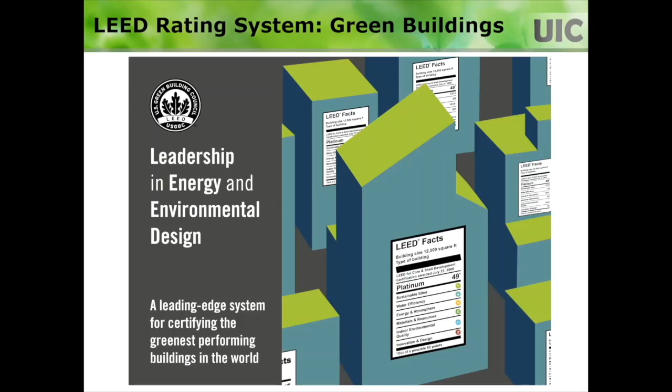Buildings are being designed and built to make them green, and the LEED rating system is often followed for this. The Envision rating system is used to develop sustainable infrastructure. If you look at an entire project, building or other civil infrastructure, rating tools such as LEED and Envision are applied, but these projects involve a lot of different project components.

For example, buildings could have foundation design. Regional stormwater management could include polluted stormwater treatment. Regional transport systems could include roadway pavement design. Polluted site redevelopment could include decontamination technology selection. I'm calling these project components.

We need to be looking at sustainability at a project component level that will contribute toward the sustainability of the overall project. While LEED and Envision are applied at the entire project level, and maybe the project is not being certified under LEED or Envision, we want to have options for designers to look at sustainability at a project component level.

So if you have different project components in a project, we want project engineers to incorporate sustainability into their day-to-day design activities. The question is how do you promote project component level sustainability so that engineers or designers can consider sustainability irrespective of whether they are pursuing any certifications for their overall projects or not.

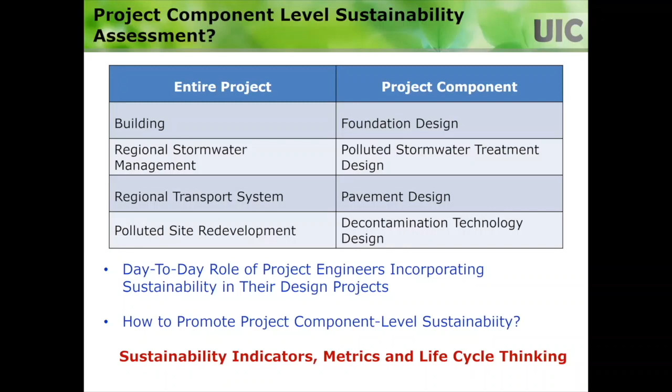For considering project component level sustainability, one should be aware of sustainability indicators and their metrics, and also life cycle thinking. Sustainability indicators and metrics are based on the triple bottom line: environmental, economic, and social.

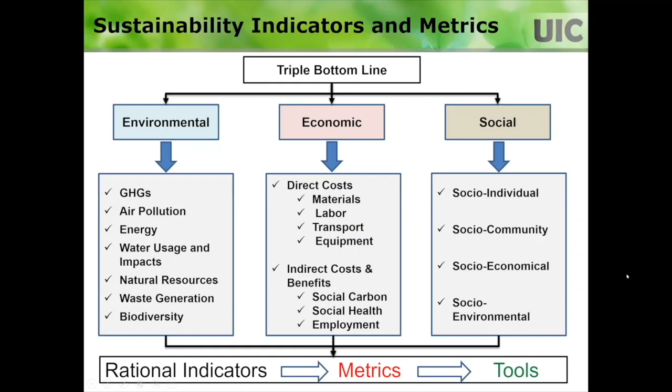You need to identify smart indicators. Examples are shown under environmental, like greenhouse gas emissions and air pollutants. Then you need economic indicators and social indicators. But these indicators should be expressed in quantitative terms called metrics, and we should have tools to calculate them. Designers and engineers should also be aware of this life cycle concept.

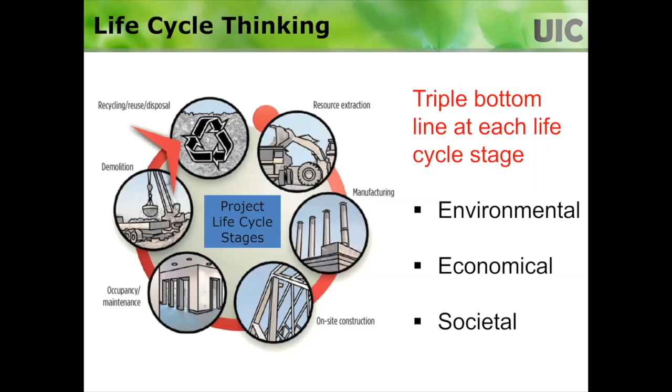We need to think about raw material acquisition, material manufacturing, construction and maintenance, and at the end of life, demolition and what should be done with the materials, either recycling or disposal. These triple bottom line aspects—environmental, economic, and social—should be considered at every life cycle stage, and all of them need to be accounted for toward the overall project sustainability.

At the project component level, sustainability assessment tools are limited, so we tried to develop a generalized framework. We called it QUALICS. In this one, we look at environmental indicators, economic indicators, and social indicators, and we apply weighing factors.

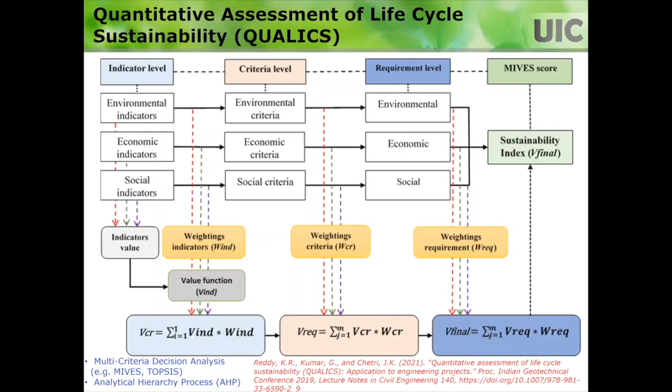We look at the criteria and requirements, and then calculate a sustainability index based on multi-criteria decision analysis, with weighing factors based on the analytical hierarchy process. We published a paper on this, and more details are in that publication.

We have applied this framework successfully for different projects, again to look at project component level sustainability. This is an example of contaminated site remediation. We have several options for remediation, and we quantified sustainability metrics for each of these options.

We used SimaPro for environmental indicators, and we looked at direct costs and social cost of carbon for economic indicators. We used social sustainability evaluation metrics, and we did an online survey to look at the social sustainability aspects.

Following the framework, we calculate the sustainability index, and based on the sustainability index, we came up with monitored natural attenuation as the most sustainable option. But based on project-specific considerations, giving social sustainability higher priority, modified capping was considered a more sustainable option.

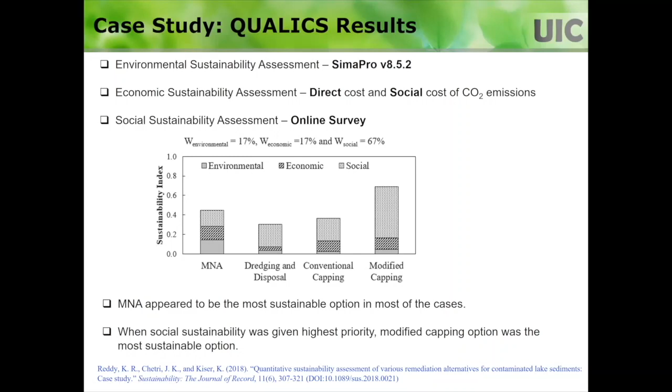There is a publication on this one. More details are given in that.

So recently, we embarked on developing a new framework. This framework incorporates resiliency with sustainability, and it can be applied to the entire life cycle of a project, or any life cycle stage of a project of any size.

The framework is flexible, with tier-based selection of tools based on the information that is available. In addition to the triple bottom line, we are looking at resiliency indicators so that we have a comprehensive sustainability and resiliency integrated framework.

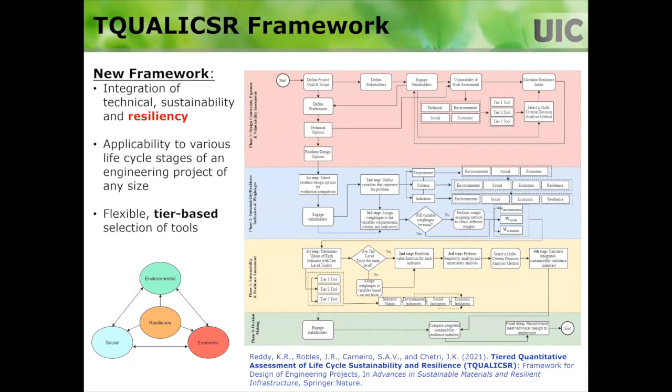So our framework is shown here. I'm going to go into details of this one very quickly. We have a publication also on this one if you want to get more details.

Resiliency is important to consider as we are witnessing a lot of these extreme weather impacts, climate change impacts, and these are expected to continue into the future until we make substantial climate mitigation efforts.

Again, showing the new framework that we developed here, it consists of 4 different phases. I'm going to go over very briefly each phase.

This is phase 1. In phase 1, you define the project goal and scope, define the preferences for the project and what are the technical options, and you look at what are the resilient design options.

So that's the linear process, but at each stage, you need to look at the different aspects. In the very beginning, you need to define the stakeholders, engage the stakeholders, and look at their preferences, keeping that in mind. And in terms of the technical options, you need to do the vulnerability and risk assessment.

In doing the vulnerability risk assessment, you need to look at technical indicators, economic indicators, social indicators, and environmental indicators. Those indicators can be quantified using different tools, and then you can use multi-criteria decision analysis to calculate the resiliency index.

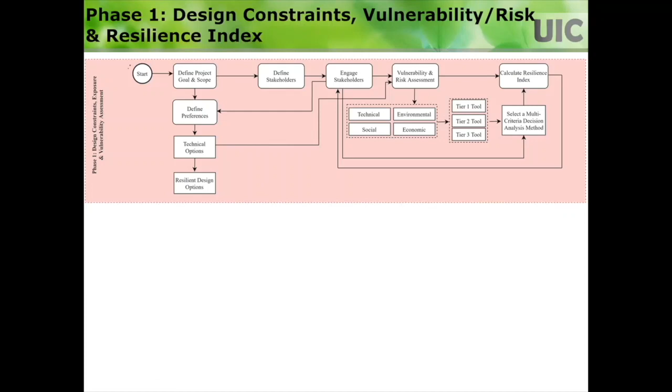And then again, you feed back that information to the stakeholders and get them involved. And then finally, you identify what are the resilient design options that you want to pursue.

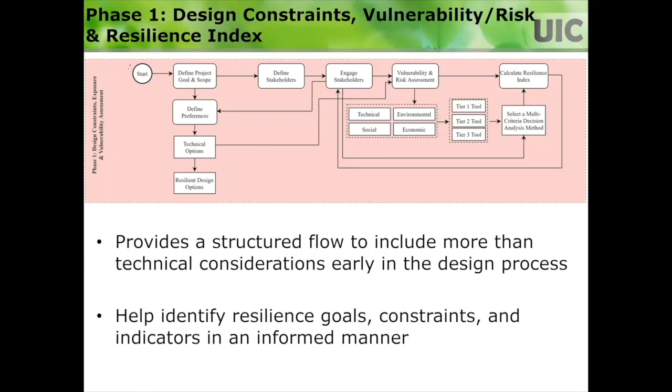So this phase 1 provides a structured flow to include more than technical considerations early in the design process, and helps identify resilience goals, constraints, and indicators in an informed manner.

So in phase 1, the most important aspect is resilient design options. And this has to be done based on the vulnerability and risk assessment. You need to incorporate adaptive measures to make the system resilient.

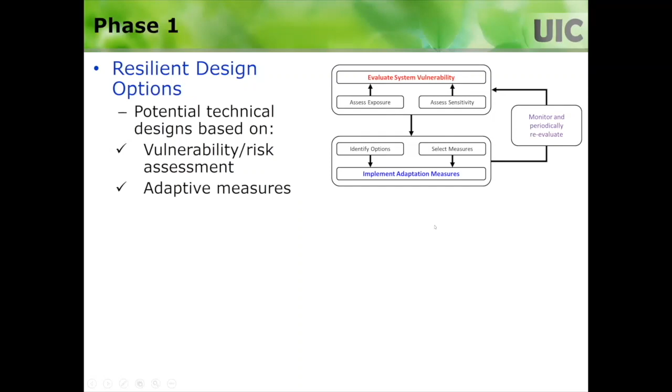Again, there is a methodology where we do the risk assessment, we incorporate the adaptive measures, and we suggest a monitoring program to keep evaluating the performance of these systems even after they are implemented.

In this one, in the very beginning, we need to identify hazard resilience indicators and metrics. They could be technical, environmental, economic, and social, and they're all interlinked.

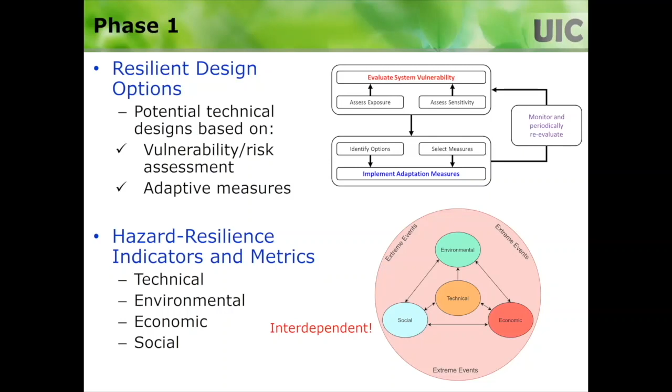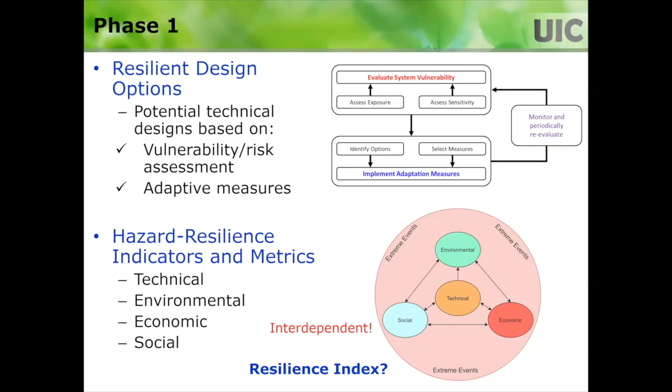Based on these interdependent indicators, we can calculate the resiliency index that can help us identify which resilient option is the most preferred option. In phase 2, we get into the sustainability assessment of the resilient options that you came up with in phase 1.

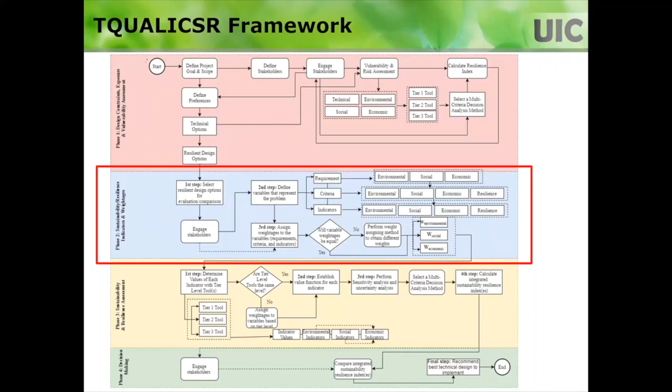In this one, we look at what are the resilience options that you want to pursue in the very beginning, and you want to engage the stakeholders and see their preference.

So once you identify potential resilient design options, you want to look at what are the sustainability variables to represent the problem, and do you need to consider any weightages for those variables. If you are going to consider different weightages, then how are you going to calculate the weighting factors - maybe analytical hierarchy process or other methods that you can use to come up with the weighting factors.

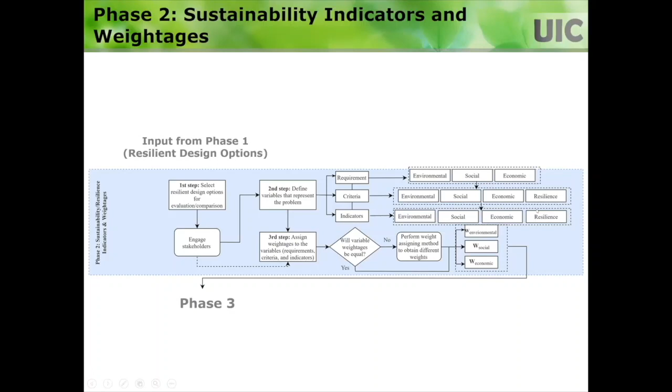And then you define requirements, criteria, and indicators. In the requirements, generally we have environmental, social, and economic. In terms of criteria and indicators, we have this triple bottom line - environmental, social, and economic - but also, to integrate sustainability and resiliency, we have resiliency indicators included in this one.

So you have requirements - environmental, economic, and social. You have criteria and indicators. As I mentioned, indicators include triple bottom line aspects. In addition to that, we have resiliency indicators in this one.

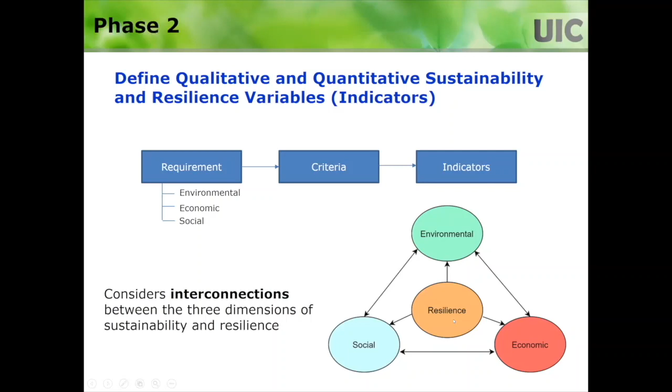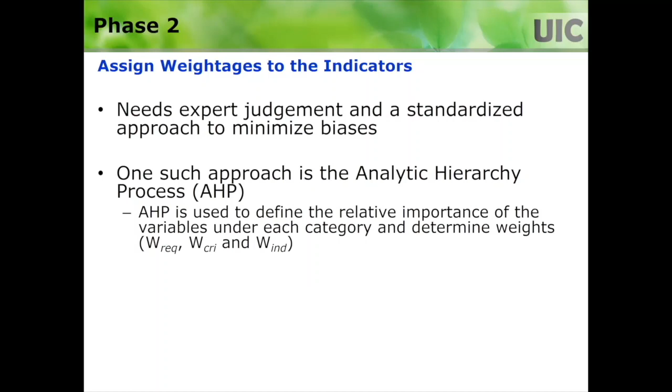So you apply weighting factors based on analytical hierarchy process that includes the relative importance of different indicators or variables. You compare the variables against each other and derive the weighting factors based on that. Weighting factors could also be at the tier level. Tier 3 is a more quantitative approach that can be weighed more compared to tier 2 and tier 1, which are based on limited information.

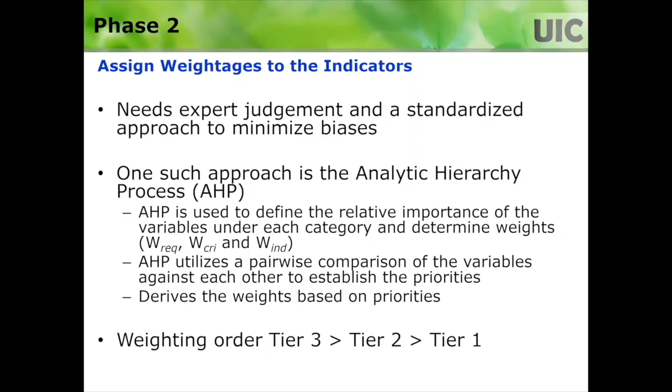In phase 3 of the framework, you calculate all the indicator values using different tools. So you have environmental indicators, social indicators, economic indicators, and then you look at what tier you're using. Do you need to assign a weightage for the tier? And then once you have all the indicators...

...with different values and different units, you want to normalize those using some kind of multi-criteria decision analysis method, and you want to do sensitivity analysis of those indicators. You could have a range of values for some indicators, and you want to also assess the uncertainty. Using this multi-criteria decision analysis, you can calculate an integrated sustainability resiliency index. Before we used to call it sustainability index, but since we are integrating resiliency here, we are calling this one sustainability resiliency index.

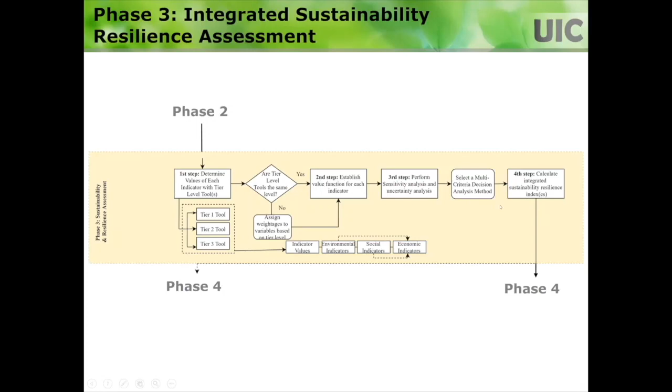The bottom line is we need to calculate these indicator values using different tools, and these indicators could be qualitative and quantitative. Some of them are hard to quantify, so we need a flexible approach to calculate these things. The bottom line is we need to indicate all these values numerically, and to accommodate the amount of information available, we proposed a tiered tools approach. Tier 1 is qualitative, tier 2 is semi-quantitative, and tier 3 is quantitative, more advanced.

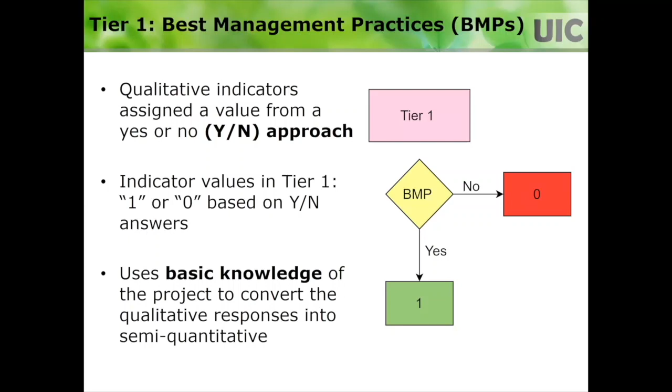In tier 1, we are talking about considering the best management practices. If you are considering the best management practice in your project, you get a score of 1, otherwise 0. This needs basic knowledge, and we are able to get some way to quantify what sustainability aspects are incorporated in the design.

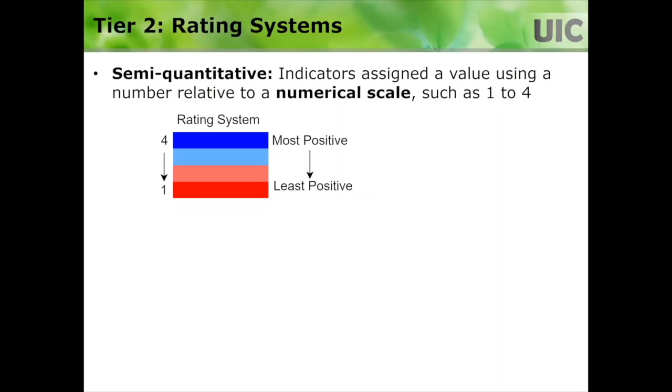So tier 2 is the rating tools. This is considered a semi-quantitative approach. You come up with the indicators and come up with a numerical scale, maybe 1 to 4. The 4 would be most positive, and 1 would be least positive. And based on this, you can come up with quantitative values for different indicators.

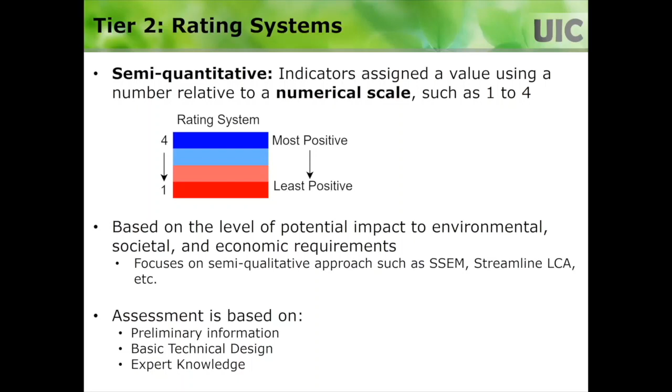There are some tools reported in the literature, such as the social sustainability evaluation matrix. For this one, you need a little bit more advanced information and expert knowledge to be able to give proper rating systems.

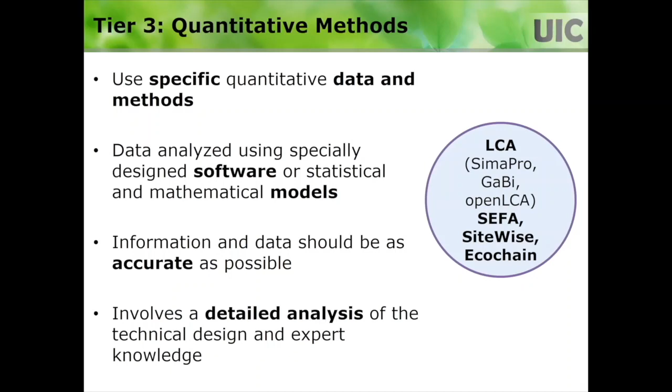The third one is the more comprehensive approach, quantitative methods. In this one, you use specific data and methods, and you have software and models that can help you quantify these indicators. For example, life cycle assessment could be used to calculate the environmental indicators. This is more detailed, and obviously you need more technical design, detailed technical design, and expert knowledge to be able to use this tier.

So we propose this tiered assessment because you may not have all the information you need for every project, for every indicator. So we wanted to have the option to use any information available to the user. And also, sometimes you don't have time, tools, or means to perform such assessments.

So just as an indicator, if you are looking at economic indicators, tier 1 could be some basic information, tier 2 could be more advanced, and tier 3 could be more advanced analysis like life cycle costs or cost benefit analysis.

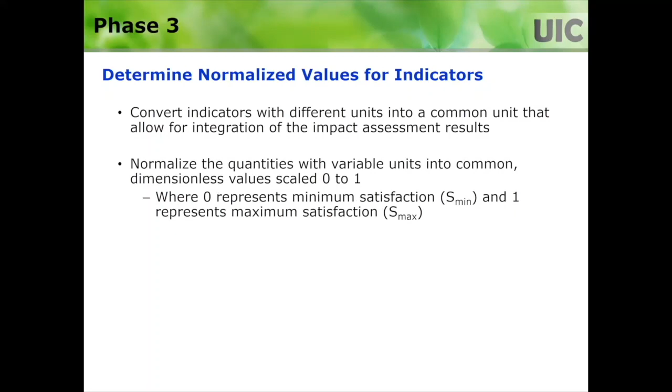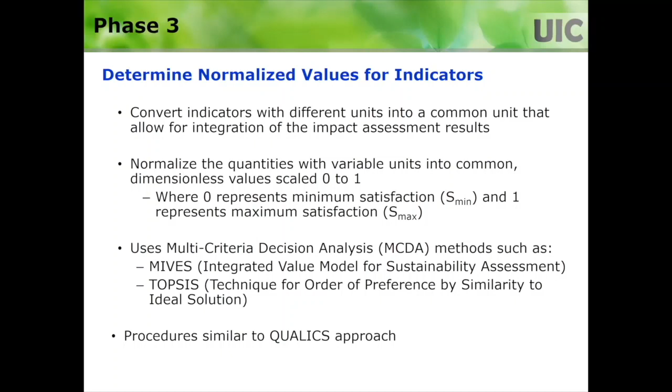So once you calculate the indicators, we need to normalize those values so that we can integrate them, generally from 0 to 1. And we use multi-criteria decision analysis, such as MIVES or TOPSIS, and we calculate the sustainability index. Here we are calling it the Sustainable Resiliency Index, similar to the previous framework that we developed.

It's important to do sensitivity and uncertainty analysis because a lot of input values are needed, and you want to look at your outcome: is it sensitive to any of the input parameters? Also, some input values could have a different range, so you want to look at that uncertainty analysis as well.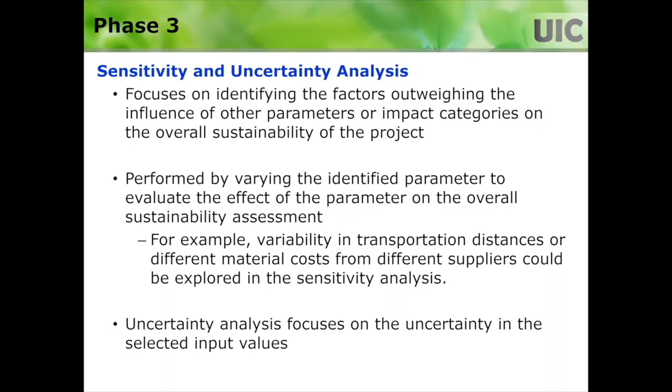So at the end, you calculate this Sustainable Resiliency Index based on the multi-criteria decision analysis, which integrates both sustainability and resiliency.

Once you have those values for different resilient options, you need to engage the stakeholders and make them aware of all assumptions and your methodology, and select the best option. The best option may not be the one with the highest sustainability resiliency index. It depends on other factors such as budget constraints, social acceptance, stakeholders' preference, and so forth.

So at the end, whatever is agreed upon with the stakeholders can be recommended as the best technical design to implement. This framework can be applied to different projects at different stages and at different scales. It is rational because it considers the life cycle bottom line aspects and integrates those with resiliency.

However, there are challenges to using any framework such as this. It all depends on the availability and variability of data that you have. There is no standardized tool, so we have to rely on qualitative and quantitative approaches. Rating systems will depend on assumptions, expertise, and biases. In particular, social impacts are very subjective and involve expert knowledge.

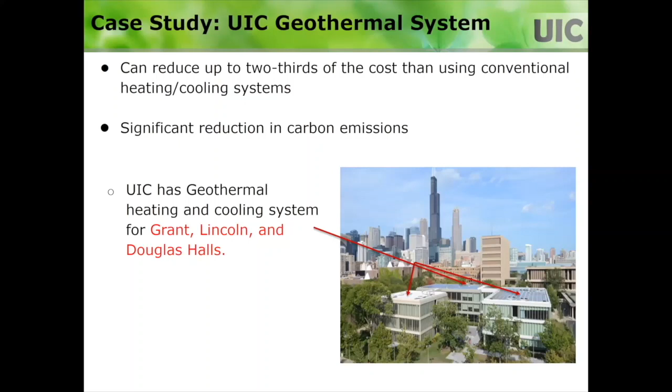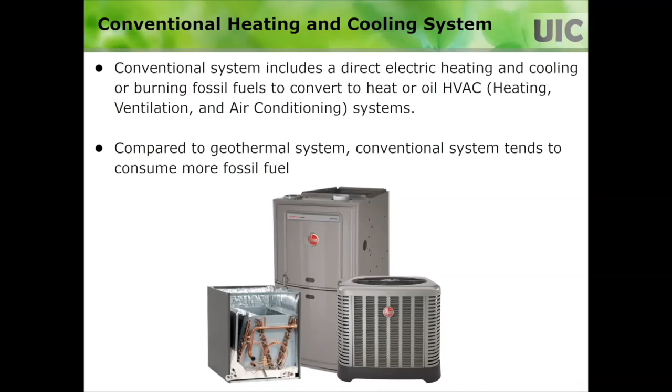Just to demonstrate how our framework can be applied, I want to show you a simple case study. This is about our campus geothermal system. Three buildings are using geothermal energy, saving cost and keeping the temperature constant. Geothermal is a substitute for conventional heating and cooling systems that use electric heating, natural gas, or oil. The idea is to compare the geothermal system with the conventional system using this framework.

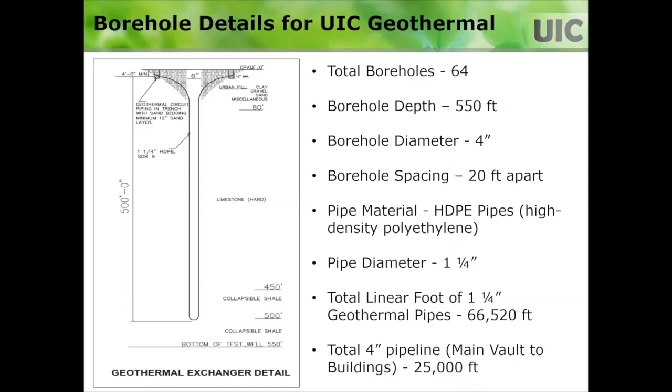We use the actual design of the geothermal system, borehole 64 and borehole depth 550 feet. All the details are given here, and we subjected this to this framework.

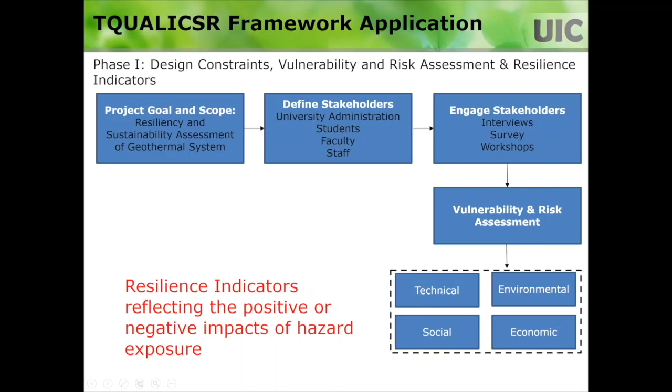Again, the project goal is to assess the sustainability and resiliency of the geothermal system. The stakeholders are university administrators, students, faculty, and staff. We engage the stakeholders through interviews, surveys, and workshops, and perform the vulnerability and risk assessment, and identify the resiliency indicators, reflecting the positive and negative impacts of hazard exposure that are technical, environmental, social, and economic.

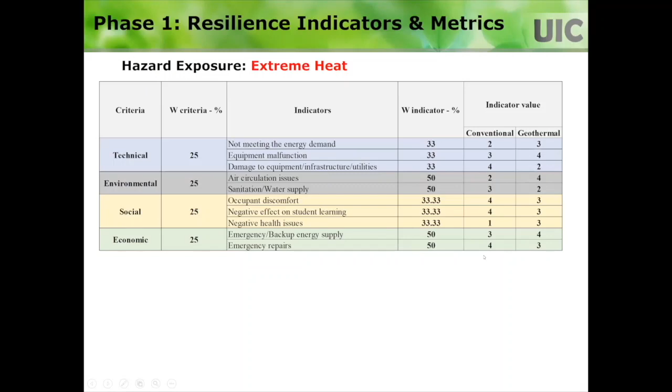As an example, we consider the hazard as extreme heat, and then identify the technical, environmental, social, and economic criteria. These are the indicators, these are the weightages, and these are the ratings based on the surveys. Following the framework, we can calculate the resiliency index.

You can see the resiliency index for both of them are not significantly different. This indicates that the technical design could be modified to make the system more resilient.

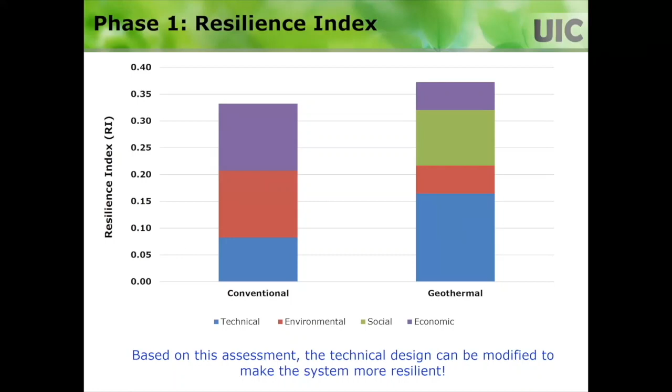Moving into phase 2 of sustainability indicators and metrics, we talk about the triple bottom line aspects: environmental, economic, and social. In addition to the conventional sustainability assessment, we include the resiliency criteria and resiliency indicators and their values. It could be quantitative, semi-quantitative, or qualitative, and they are considered here.

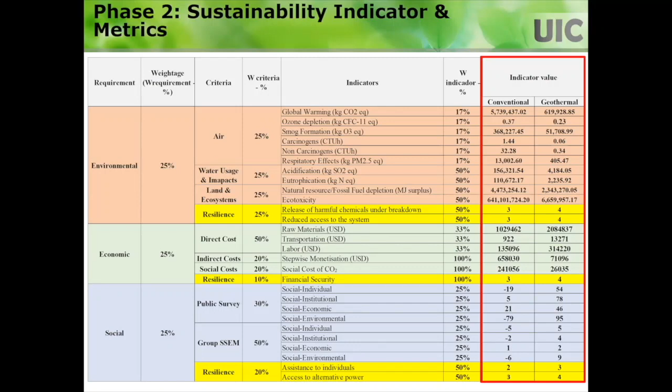These indicator values are the ones that we have to finally get. Once we have those, we can follow the multi-criteria decision analysis and calculate the sustainable resiliency index.

Again, the decision making is not straightforward. You don't just look at that sustainability resiliency index and make decisions. You look at the stakeholders' preference and make the final decision. In our university, the geothermal system is implemented and has been operating quite well for many years.

It's quite flexible and can consider complex projects or simple projects at any stage. Of course, the application can be challenging based on the availability of data, methodology, and assumptions. Even though sustainability and resiliency are not required by regulations or codes as of now, it's our responsibility to account for those things and do the projects right.